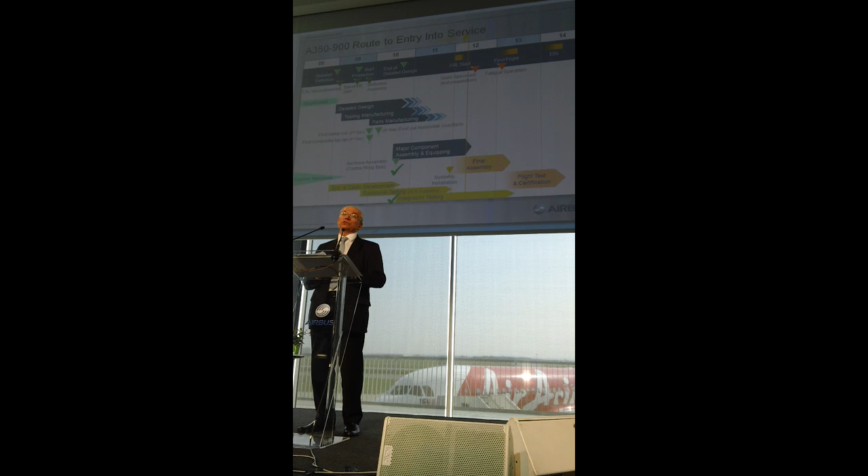So this is where we go, and the key milestone that we have ahead of us is certainly the first flight. What we did in the last 6 months has been extremely significant for the program. We had two major milestones. One was to start the final assembly line, and you could see yesterday where we are, and I will elaborate a little bit more on this today. And also start the system installation for the first flying aircraft, MSN-1. First start was with the static test specimen. So these were the challenges, and I think we are on a good track on these two milestones.

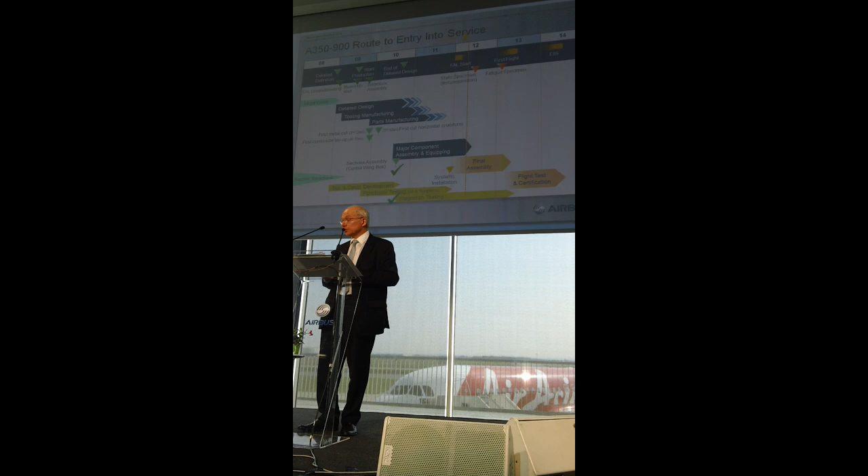And then going forward, it will really be the final assembly line of MSN-1 and how we prepare the flight test program. This preparation is usually done with a lot of testing, meaning to bring maturity into the systems and to facilitate integration and the flight clearance later on, and of course in parallel our production lines will now steadily produce new components, in order to feed our final assembly line and to go progressively from the rate we are today to rate 1 and then further on.

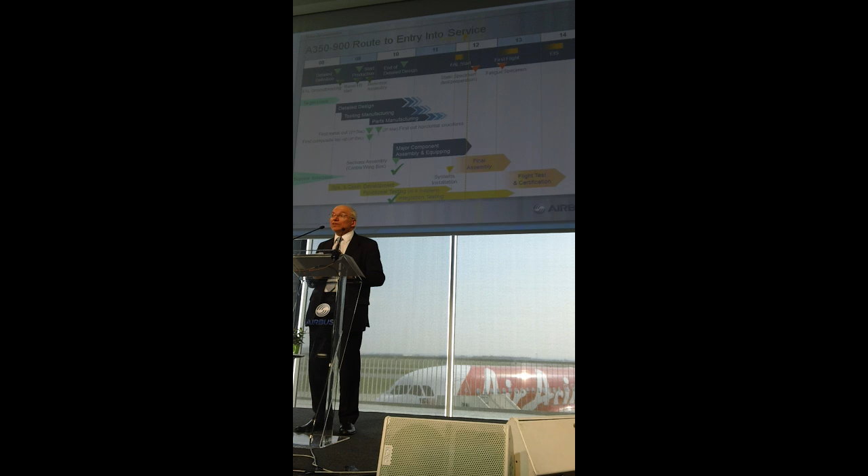So these are all the things that go in parallel, both industrial, technical, and a lot is going on at the moment, and almost every day. For instance, yesterday I was in Donauwörth inaugurating and accepting the first set of doors for MSN-1, while today, and I will show you at the end, we were moving the ES from station 50 in the FAL into station 40. So a lot's going on, but I will not spend too much time on the product itself.

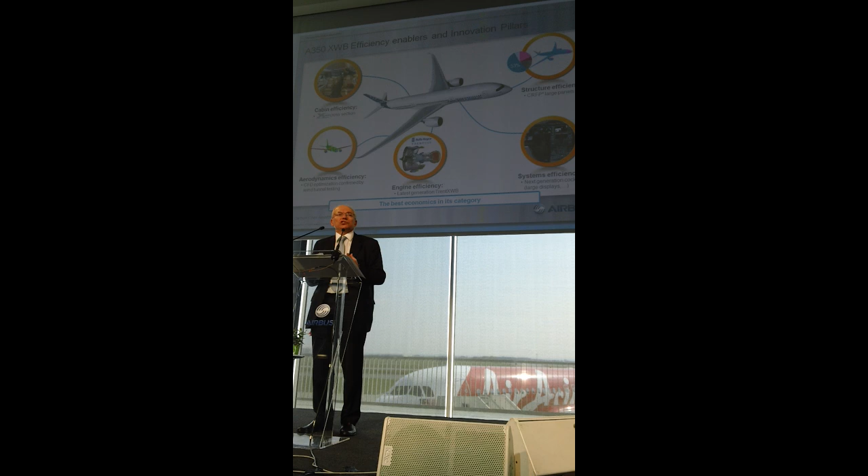I think it's been the subject for Innovation Days before, and just this very simple chart to remind ourselves that this is a very innovative family of product, not just the 900, but the whole family, and this is going from the... clockwise. We would start with, of course, what everybody knows. It's a composite aircraft, major dominance of composite material in this aircraft, but also a lot of improvement on the system, even though we start from the A380 basis. There is no huge difference in terms of architecture, but very significant improvement. For instance, here is mentioned our new cockpit design with large displays, and it's really a breakthrough.

Of course, we have this new engine, the XWB engine, developed by Rolls-Royce, which brings a very significant part of the economics that the A350 delivers to our customers. And the rest is coming from obviously the material that we use and the high degree of optimization of the aerodynamic shapes of our aircraft, for which we have used in a very extensive way all the computation techniques that we have today with us.

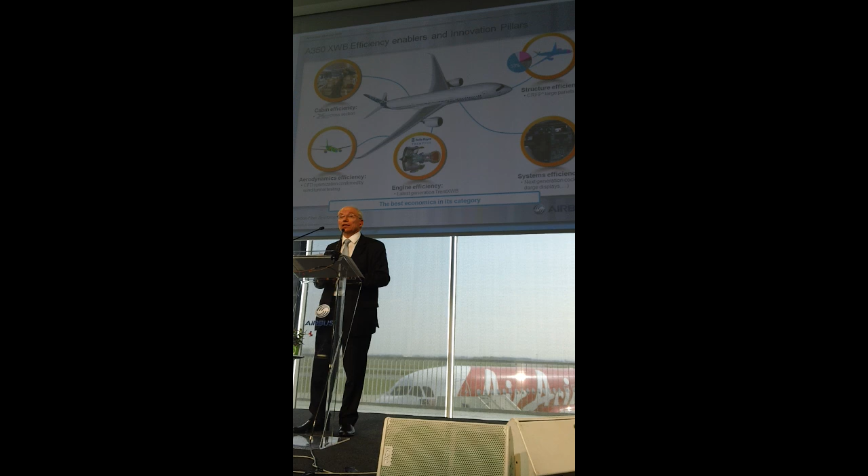And last but not least, of course, and this will be at the end what the customers will see, a lot of innovation in the cabin, in its design, in its comfort, in its efficiency, and also for the comfort of the passenger. The way we can, through the use of the carbon fiber shell, and without penalizing the performance of the aircraft, fly the cabin at a much lower altitude. So all this is embedded in our product, and it's very much changing the rules everywhere.

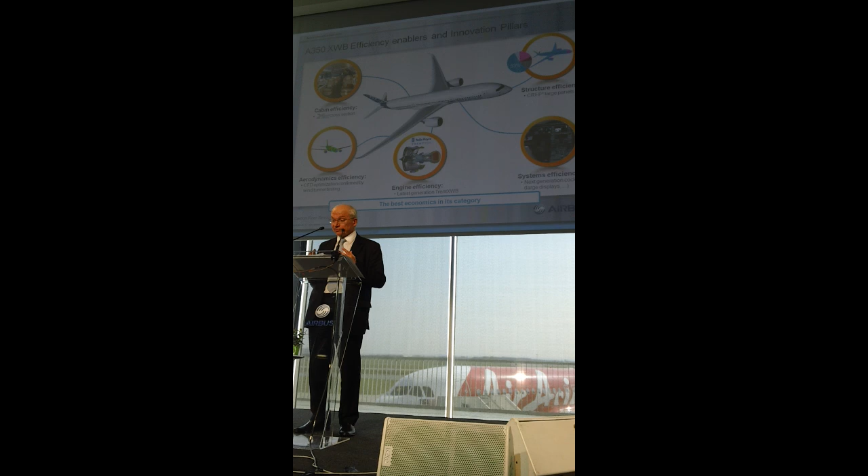And this is, of course, in particular true in the airframe itself, where we have moved not only Airbus, but also all our supply chain to this new world, which is not just dealing with structure, but also dealing with all the system integration into the structure. It's really a new world, industrial world, technical world, which affects the whole value chain for the product.

What we can just remember here is that on the choice of CFRP inside this aircraft, of course we have gone to a very large extent in the full composite aircraft, on the wing or on the fuselage, but we've kept some metallic parts where we thought that the trade-off was really not working well for the composite, and this is, for instance, the case of the very front fuselage, where for many reasons, including system integration, but also including operations, we decided to stay with a metallic part.

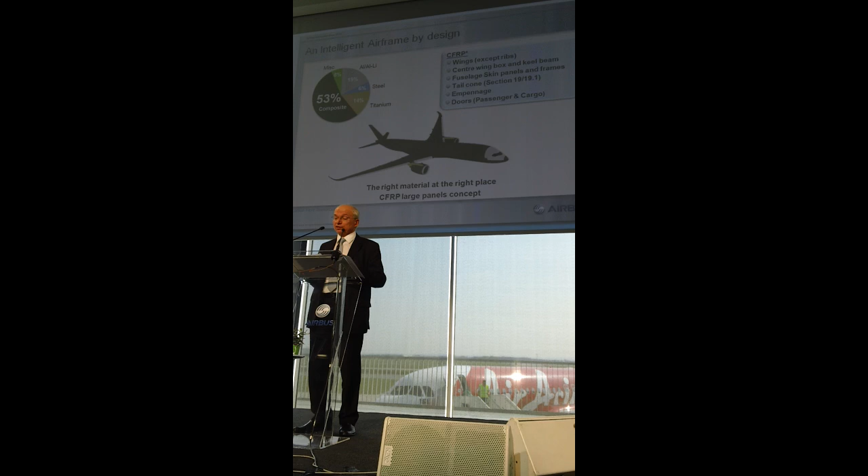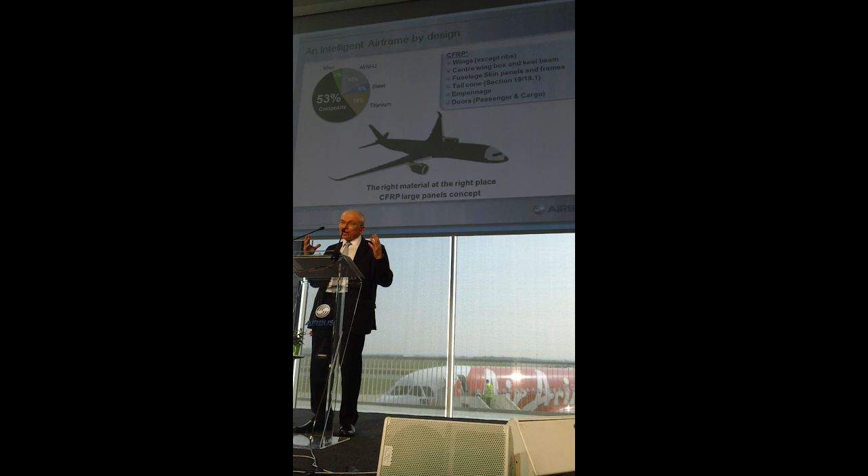Otherwise, the other characteristic that was a big debate at the beginning of the program was our integration concept. Should we go with full barrels? Should we go with large panels, very long panels? And we decided, as you know, that we would go for the large panels concept, which in fact we will see a little bit later is a little bit of a mix. So I think we have made the right choice by having the right material at the right place. And today our industrial process tends to demonstrate that from an integration point of view, from an assembly line point of view, we have also made the right choice with our panel concept. So that's the technical framework in which I have to drive this development program.

So the exam question was how to bring enough maturity throughout the development program and everywhere. And yesterday Tom Enders was recalling that we have introduced and we follow very thoroughly the notion of technology readiness, both for the technical side and the manufacturing side. And one of the exam questions was to accelerate the readiness of the carbon fiber technology for being ready to get in full production with such an aircraft, while only 4 years ago, if I refer to 2006, it was in Airbus the very beginning of this journey.

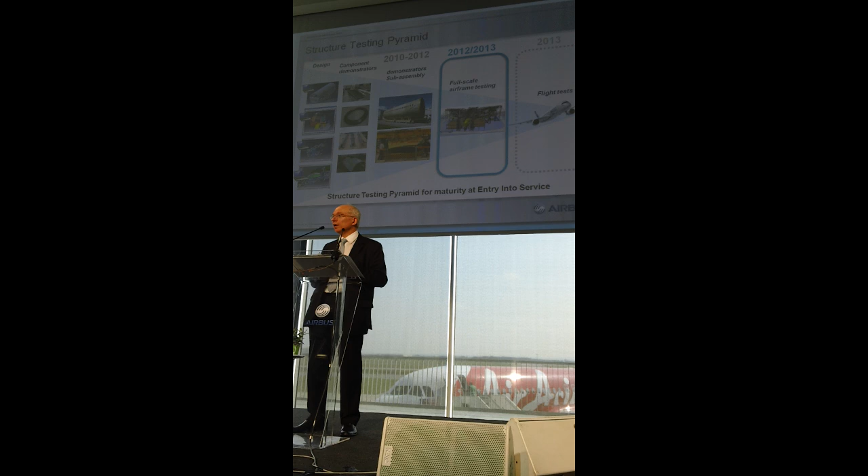So from the beginning, we had to develop our sizing tool, and here what we've made different, we have one sizing tool, which is used by everybody, all the design, all the stress guys throughout the program, not only in Airbus, but with our risk-sharing partners as well. So that when we have the validation or further improvement of this tool, it benefits all. This was a very big and important decision taken at the beginning, and then we had the progressive testing of demonstrators, starting from components to sub-assemblies.

You probably remember, some of you at least, that 2 years ago we were showing these 2 fuselage barrel generations, which have tremendously contributed to the maturity of our product. And now we are very much at the end of the journey, and 2012, 2013 will be dedicated to large-scale and very large-scale demonstrators. I can only show 1 or 2 examples of this in this short presentation.

And this was an important test that we had last year, which was meant to demonstrate that our crash resistance concept was working. The requirement is very simple. It has to be like a metallic aircraft. Sometimes we are constrained by the authorities: although we have a new technology, we have to compare to what it was before on the previous technology.

And here, this was the exam question, and we had developed a concept on our fuselage, the lower part of the fuselage, that could replicate or be better than a metallic aircraft of today. And this was the final demonstration, which worked very well and could demonstrate the accuracy of the modeling that we had developed prior to this test. As you can imagine, this test was thoroughly simulated and modeled before we went for the actual test, and then we can obviously refine the modeling even further and optimize even further the definition.

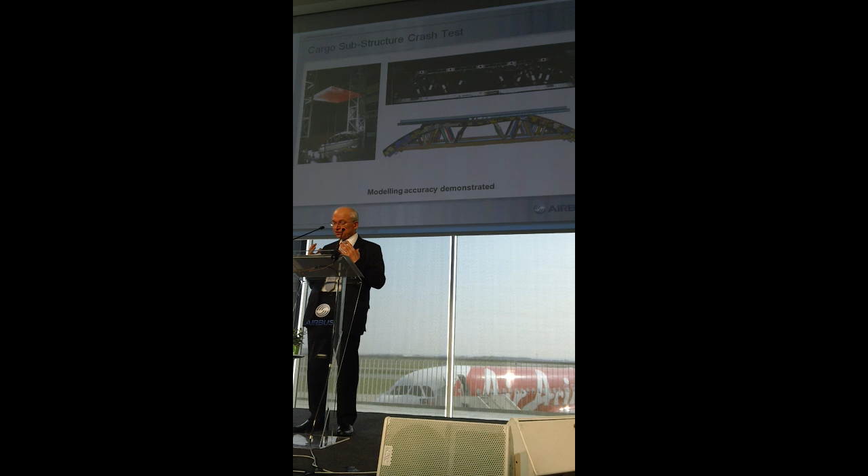So this is very much the kind of demonstrator, and we have many of them, which aim to anticipate what we will be finding on the real testing where we are getting now. And I could mention in this area we had built a pylon which has gone through a series of fatigue testing already. We had also built a rear section with the vertical tail plane that we have also exposed to fatigue testing. So that's a lot, and this has a goal. The goal is to de-risk as much as we can. But you're never sure, right? You have to be always modest in front of these technology changes. It's for really de-risking the big testing that we are now preparing.

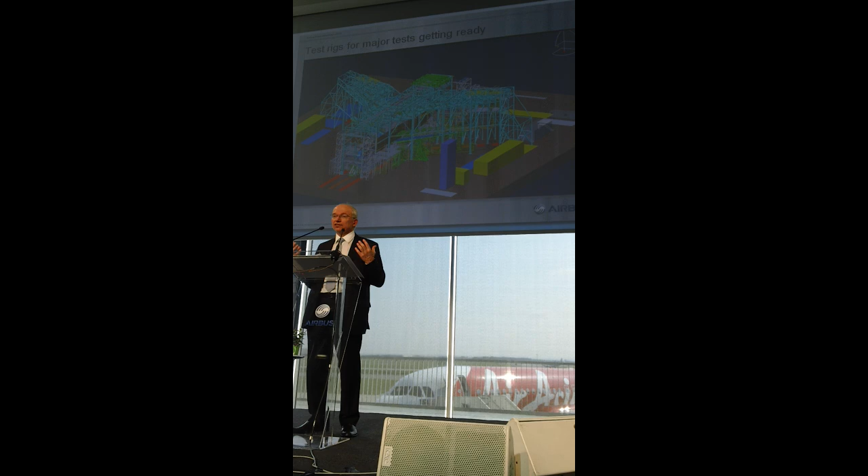The aircraft that you saw, the fuselage of yesterday, is going to move in the summer to the testing hangar. We're going to use the L34, the Lagardère 34 building, the same as for the A380 in the past. We have transformed this building to be able to accept the A350, and we have now designed a completely new load introduction system that fits the A350. But what is new here is that in parallel, and just before it, we will have run the test on a full finite element model of the aircraft. The new computing tools that we have now enable bigger and bigger models, and this is the first time that we will have this kind of model.

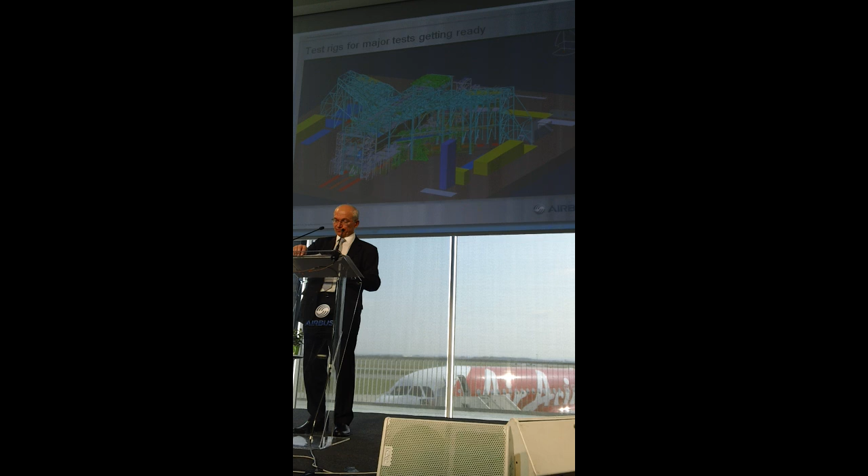This will be in order to rehearse the test, in order also to then further optimize the test, and in case something would go wrong, to be faster in the repair strategy that you would have. This is very strong cooperation, collaboration between modeling and testing, and this is the right way to go in order to de-risk as much as we can the program, knowing that you are never 100% immune to a problem that could go wrong. So very much the same was applied on the systems.

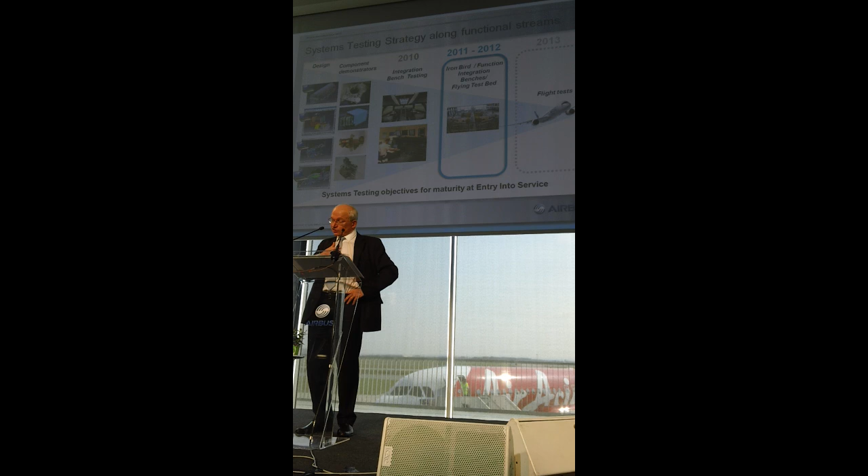Here our key word for systems is: how can we be more mature when we get to the first flight? How can we be almost service ready when we come to the first flight? Not just go for the first flight with what you have, but go to the first flight with what you need for entry into service. And this has always been our strategy, which is first of all based on a different testing strategy: do more at the supplier, have a more functional approach, go step by step to more and more integrated testing, and finally have a flight clearance for the first flight which is really close to a flight clearance for a certification start. So this is the concept. What can I show today on top of what we were doing in the past program?

First of all, I think this is something that we've never done before. A virtual platform: before you have all the actual hardware and software, you can use this virtual platform with models of all the equipment that are then going to be delivered by our suppliers, integrated from the model's point of view, well before you can integrate the hardware. And this is really important, because thanks to this you can really debug a lot of things at the model level. And this is then a way to go much faster in the integration of the big test means that we are now running.

And at the end, it's also like a third simulator. Today we have 2 full simulators for the A350, and this is acting very much as a third simulator, much less expensive, much more flexible, where we can do actual testing and actual demonstration of aircraft performance. And this is one of the big changes that we have made: integrate very accurate models of the function and of the equipment well before we have them for real in hardware and software.

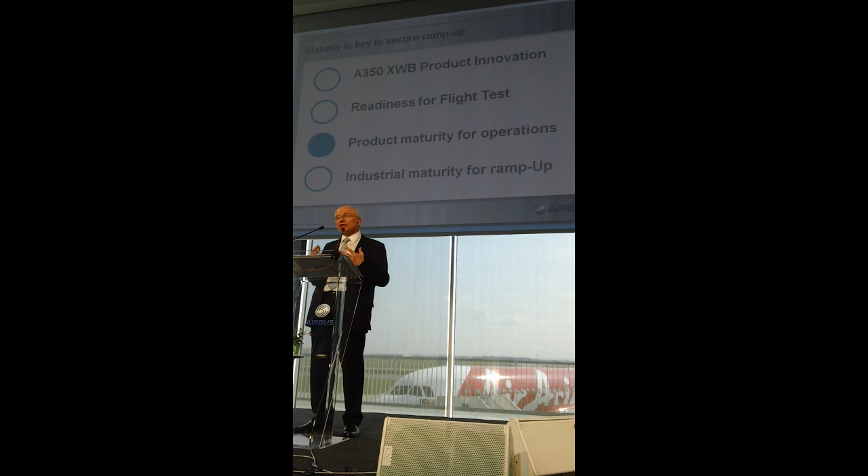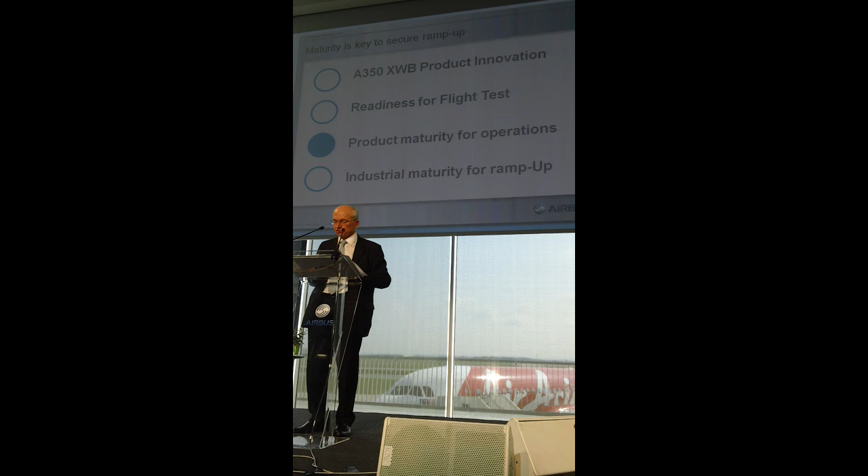So that's very much the technical side of the flight test preparation. But of course there is much more. And if I come to the industrial side, to our operations and how we make our operations converge with the preparation of our airlines' operations later on, there are a couple of topics that I'd like to address now. And here we come to our principle in this program, which is DMU, Digital Mockup, is really the master. Digital Mockup is a huge library of data that we share with all our risk-sharing partners, that we can access in real time through all the tools that we put in place at the beginning of the program.

And this is really a breakthrough compared to what the A380 was. But I think I already presented this. But now, what is it that makes a difference today in the phase we are in, when building the first aircraft, managing the configuration of the development aircraft and the first customer aircraft? I will mention here two elements. One is, of course, discipline. Discipline, which is DMU quality gates. And we have implemented from MSN1 at the very beginning of the program a very strict quality gate process, which we've been developing through the A380 program, which has made a difference, frankly, in the A380 program when we started to improve the delivery performance.

And we are reusing, but we are reusing it from day one and from MSN1 onward. So this discipline is there. And there is another functionality which is also something that is coming from the A380, in terms of almost a dream at the time: could we have all the electrical design implemented in the DMU?

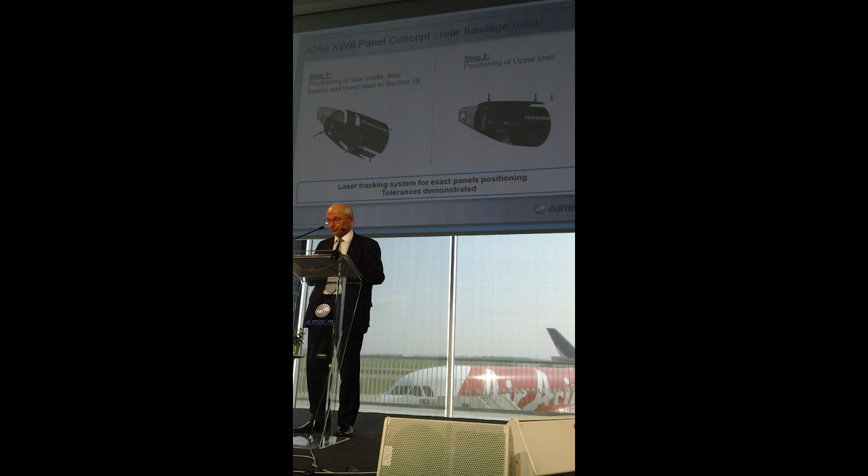And the other topic I'd like to mention is how this panel concept actually works. I took the example of the rear fuselage. The rear fuselage is a very long fuselage. It's almost 20 meters long from the back to the front, where we join with the center fuselage. And this is the architecture. In fact, the rear end up to the rear pressure bulkhead is a full barrel, which we call section 19.

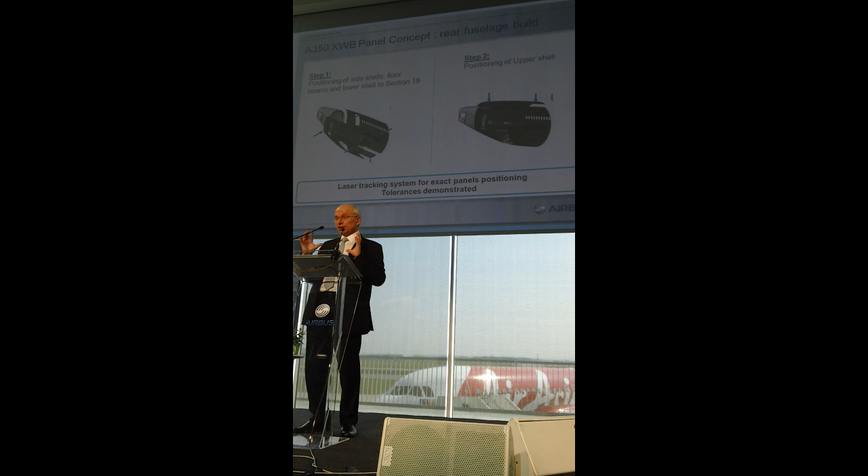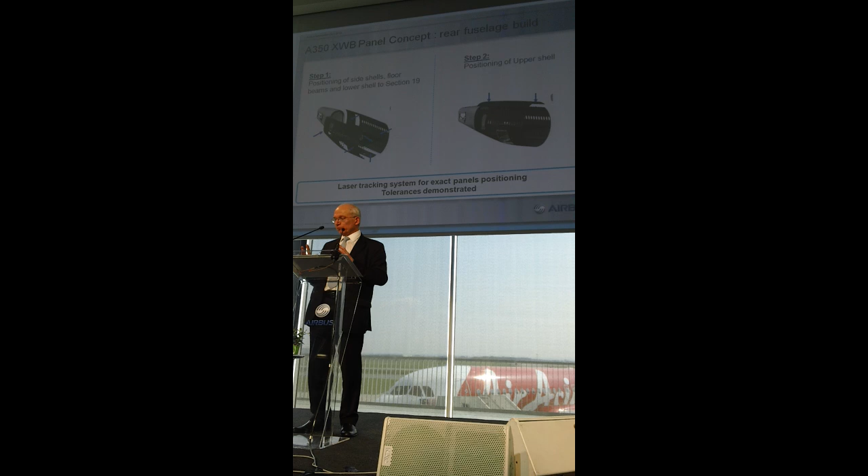And then on top of this full barrel, which gives the geometrical reference, we build the panels. We build the panels in two steps: the lower and lateral shells, and then finally the upper shells. And when we do that, we can ensure perfect tolerancing at the joint level, and we track these tolerances with a laser tracker, and then we feed this data into the final assembly line.

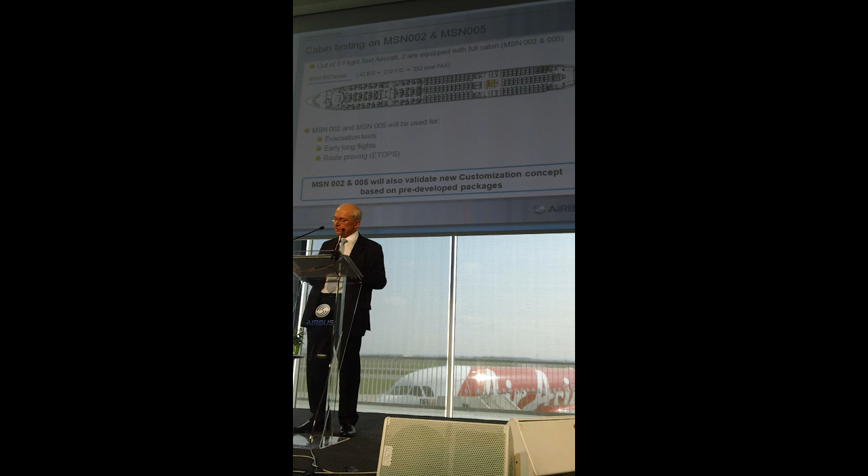And I think what was important is that we will use these 2 aircraft in the flight test program for very important tests. And finally, MSN5 will be used for route proving, because it will be extremely close to the first customer's aircraft in terms of structure and general condition. And by building it, we've tested our customization process internally well before